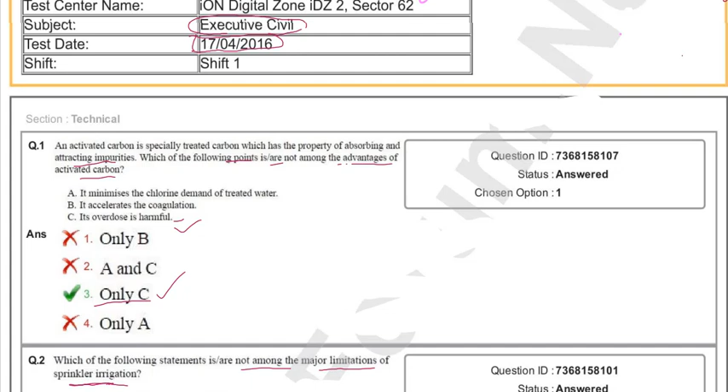Now moving to question number two. Which of the following statements is or are not among the major limitations of sprinkler irrigation? A. Strong wind disturbs the sprinkling. B. It requires heavy initial investment. C. It minimizes the erosion of the soil.

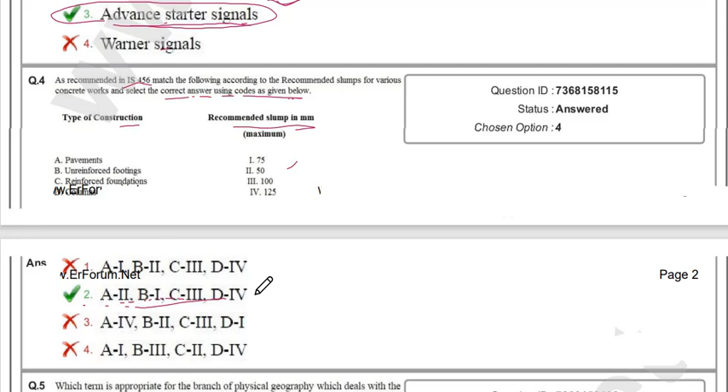Now question number 5. Which term is appropriate for the branch of physical geography which deals with the origin and distribution of water on the earth's surface? For this, option C, hydrology, is the correct answer. Now moving to question number 6: in which type of foundation is the length considerably greater than its width? For this, option 4, strip foundation, is correct. Now question number 7: blank is the algebraic sum of the moments of the forces on either side of the section of a loaded beam. For this, option 4, bending moment, is the correct option.

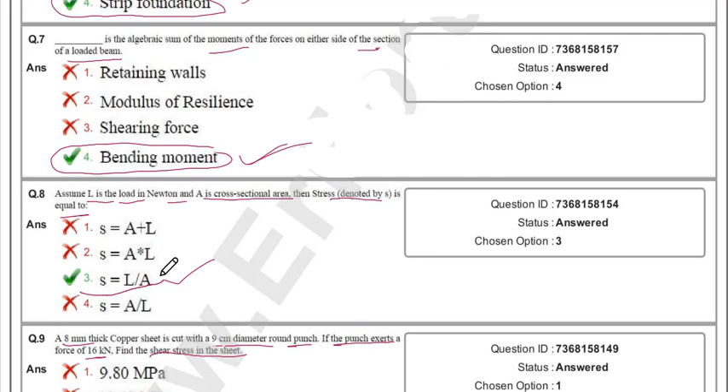Question number 8: assume L is the load in Newton and A is the cross-sectional area, then stress denoted by S is equal to? For this, option C, S = L/A, is the correct option. Now question number 9. An 8 mm thick copper sheet is cut with a 9 centimeter diameter round punch. If the punch exerts a force of 16 kilonewton, find the shear stress in the sheet. You can calculate, and the answer will be the third, 7.08 MPa.

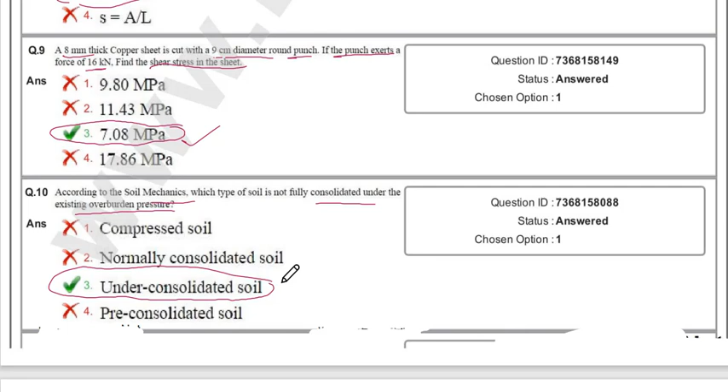Now question number 10. According to soil mechanics, which type of soil is not fully consolidated under the existing overburden pressure? For this, option C, under-consolidated soil, is the correct option. Now question number 11: blank is the normal stress when it acts into the area. For this, option three, compressive stress, is the correct option.

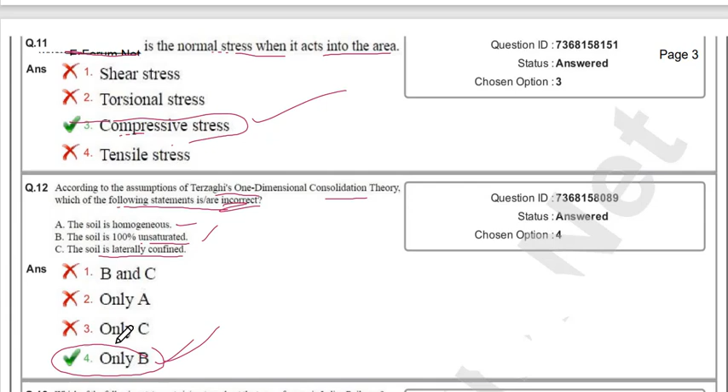Now question number 12. According to the assumptions of Terzaghi's one-dimensional consolidation theory, which of the following statements is or are incorrect? The soil is homogeneous. The soil is 100% unsaturated. The soil is laterally confined. For this, B is the correct option, which is mentioned in option 4. Only B is the correct answer.

Question 13: Which statement is true about the types of gauge in Indian Railways? In broad gauge, the clear distance between inner faces of two rails is 1.676 meter. In meter gauge, it is 1.24 meter. In narrow gauge, it is 0.62 meter. The correct option is the second one.

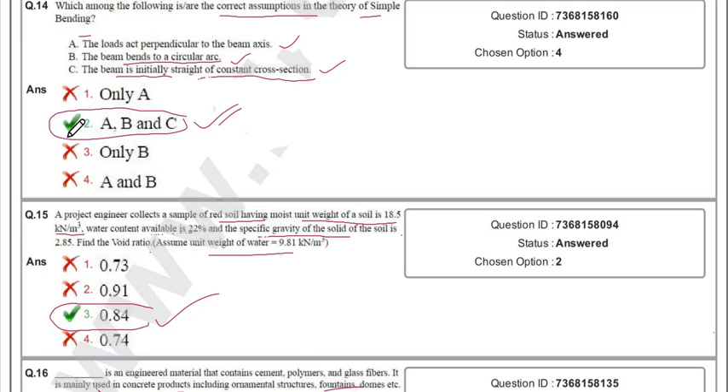Question 14: Which among the following are correct assumptions in the theory of simple bending? A: load acts perpendicular to the beam axis. The beam bends to a circular arc. The beam is initially straight with constant cross section. All of A, B, C are correct, as mentioned in option second.

Question 15: A project engineer collects a sample of red soil having moist unit weight of 18.5 kilonewton per meter cube. Water content available is 22% and specific gravity of soil is 2.85. Find the void ratio, assuming unit weight of water is 9.8 kilonewton per meter cube. You can calculate and the answer will be option third, 0.84.

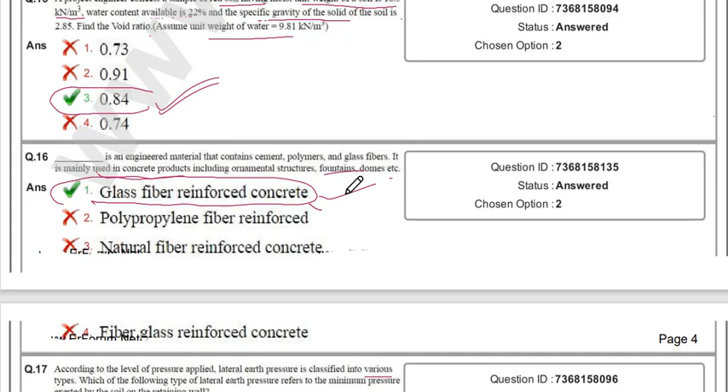Question 16: Dash is an engineered material that contains cement, polymers and glass fiber. It is mainly used in concrete products including ornamental structures, fountains, domes, etc. The correct option is glass fiber reinforced concrete, mentioned in option A.

Question 17: According to the level of pressure applied, lateral earth pressure is classified into various types. Which type refers to the minimum pressure exerted by the soil on the retaining wall? The correct option is second, active earth pressure.

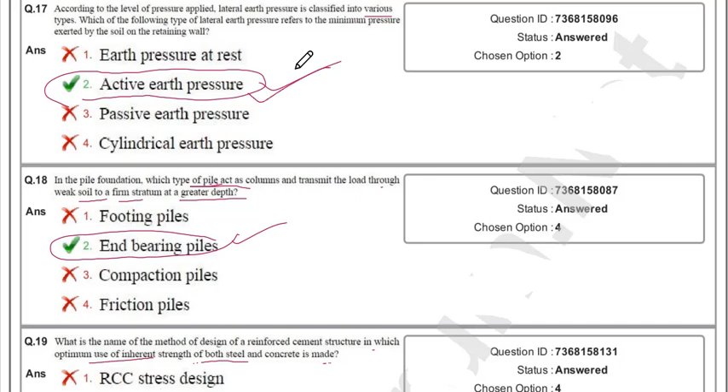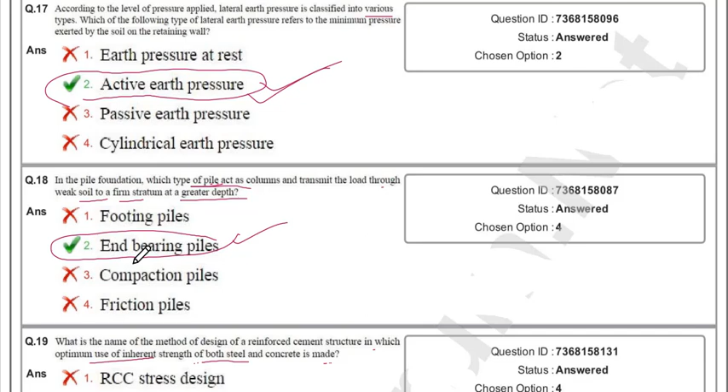Question 18: In pile foundation, which type of pile acts as a column and transmits the load through weak soil to a firm stratum at greater depth? The correct option is second, end bearing piles.

Question 19: What is the name of the method of design of a reinforced cement structure in which optimum use of the inherent strength of both steel and concrete is made? The correct option is fourth, ultimate load strength.

Question 20: Which of the following factors affect the per capita demand of water? Climatic condition of the region, industrial and commercial activity of the region, and population all affect the per capita demand of water. All these are mentioned in option third, ABC, which is the correct option.

Question 21: If R is the radius of the curve in meters and C is the chord length in meters, what would be the expression to denote versine V in millimeters? The correct answer is option third, V equals 125 C square by R.

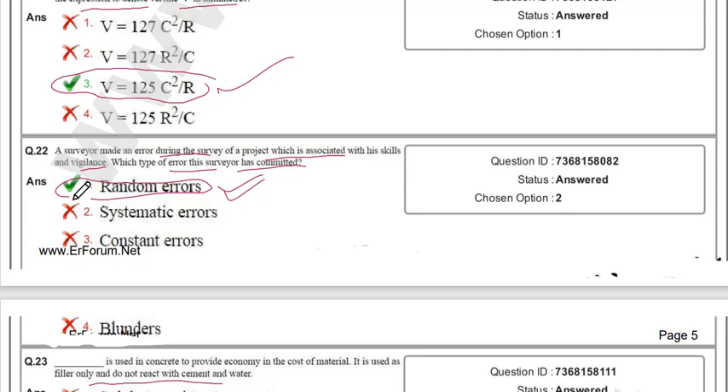Question 22: A surveyor made an error during the survey of a project which is associated with his skill and vigilance. Which type of error has this surveyor committed? This surveyor has committed a random error, mentioned in option A, which is the correct answer.

Question 23: Dash is used in concrete to provide economy in the cost of material. It is used as a filler only and does not react with cement and water. The correct answer is option third, aggregate.

Question 24: Which apparatus is used to perform the soundness test of cement? The Le Chatelier apparatus is used for this. Option A is the correct answer.

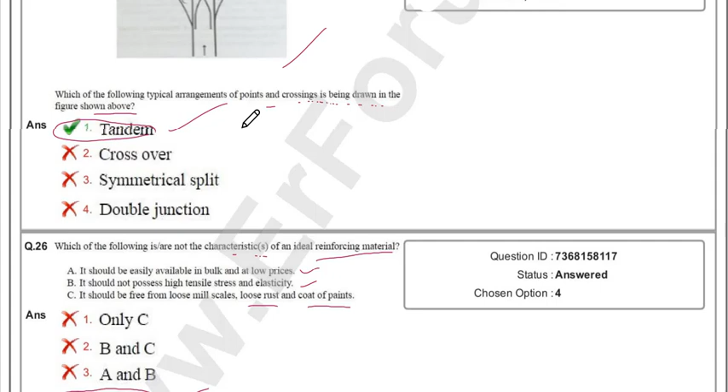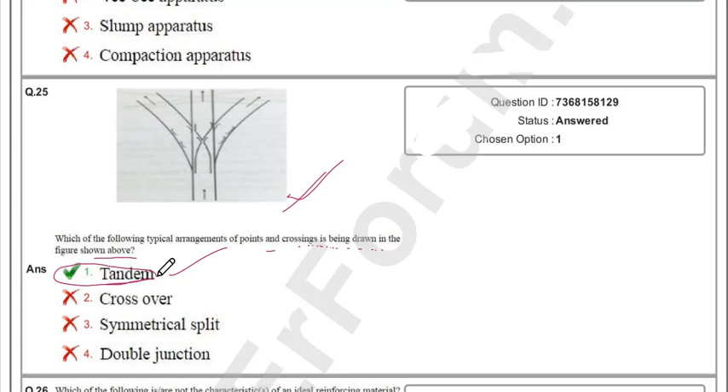Which of the following typical arrangements of points and crossing is being drawn in the figure shown above? This figure shows a tandem arrangement. Option A, tandem, is the correct answer.

Question 26: Which of the following are not the characteristics of an ideal reinforcing material? It should be easily available in bulk at low prices. It should not possess high tensile stress and elasticity. It should be free from loose mill scale, loose rust and coat of paints. Only option B is the correct answer.

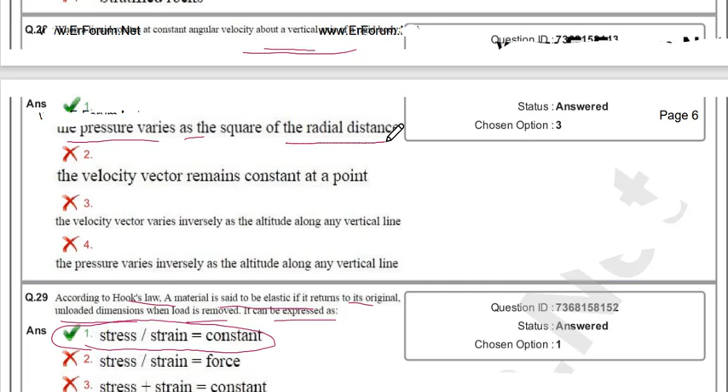Question number 29: According to Hooke's law, a material is said to be elastic if it returns to its original unloaded dimension when load is removed. It can be expressed as stress upon strain equals constant. Option A is the correct answer.

Question number 30: In which type of joint are plates to be fastened placed one over the other and riveted by one or more rows of rivets? Option 4, lap joint, is the correct answer.

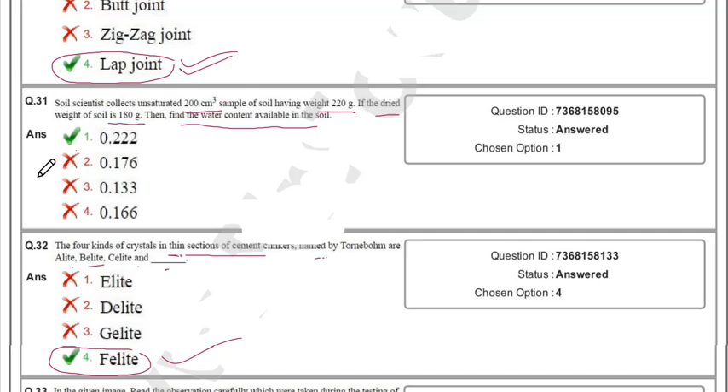Question number 31: Soil scientists collect an unsaturated 200 cubic centimeter sample of soil having weight 220 grams. If dried weight of soil is 180 grams, find the water content available in the soil. You can calculate the amount of water as 0.222.

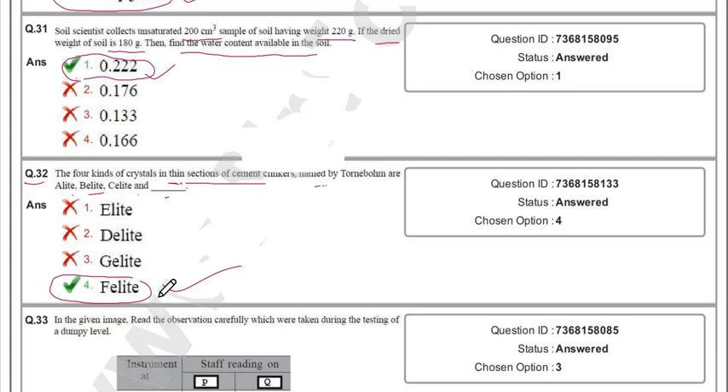Question number 32: The four kinds of crystal in thin section of cement clinker named by Tornebohm are alite, belite, celite, and... felite is the fourth option, which is correct.

Question number 33: In the given image, read the observations carefully which were taken during the testing of a dumpy level. The instrument at P and Q, staff readings on P and Q. For P, the reading is 1.543. For Q, 2.123. Then for Q again, 1.121, and for Q with 1.750.

To what reading should the line of collimation be adjusted when the instrument was at Q? For this, option 1.146 meter is the correct answer.

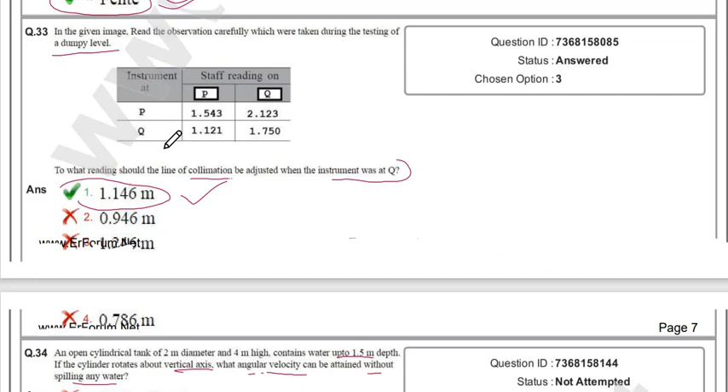Question number 34: An open cylindrical tank of 2 meter diameter and 4 meter height contains water up to 1.5 meter depth. If the cylinder rotates about a vertical axis, what angular velocity can be attained without spilling any water? You can calculate, and 9.9 radian per second will be the correct option.

Question number 35: What would be the approximate weight of rail required for... Question number 34's answer is 9.9 radian per second.

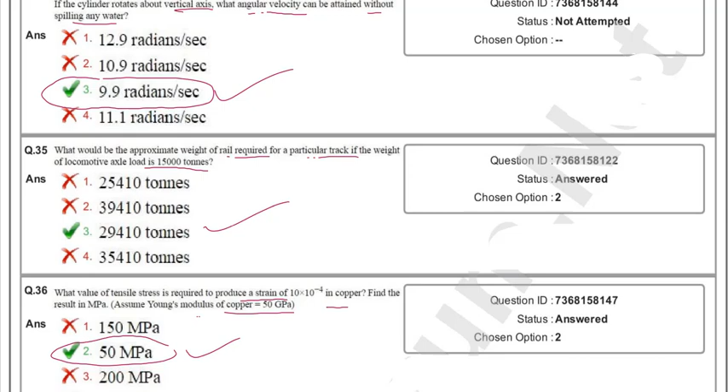Question number 35 asks: what would be the approximate weight of rail required for a particular track if the weight of locomotive axle load is 15,000 tons? You can calculate, and answer third will be the correct option: 29410 tons will be the correct answer.

Question number 36 asks: what value of tensile stress is required to produce a strain of 10 into 10 to the power minus 4 in copper? Find the result in MPa, assuming Young's modulus of copper is 50 GPa. The answer is option second, 50 MPa, is correct.

Question number 37: Which of the following statements are incorrect about prismatic compass? The needle is broad but does not act as an index. Graduated ring is attached with the needle. This does not rotate along with the line of sight. The readings are taken directly seeing through the top of the glass. For this, option C, only C is correct, which is option third.

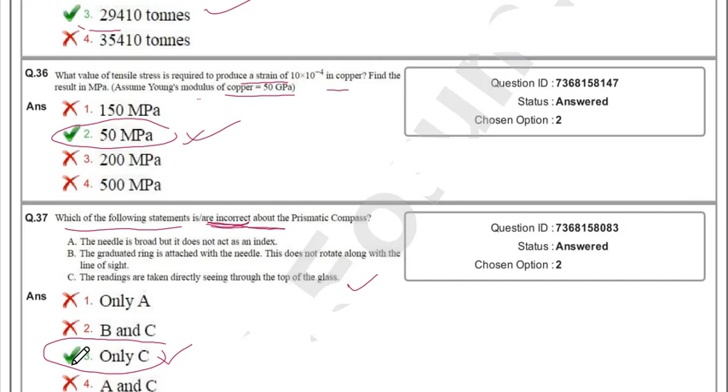Question number 38: Which of the following statements describe limitation of concrete technology? Availability of concrete ingredients easily. Due to low tensile strength, concrete is required to be reinforced to avoid cracks. Monolithic character gives better appearance. The property of concrete possesses high compressive strength. For this, option third, only B, is the correct answer.

Now question number 39.

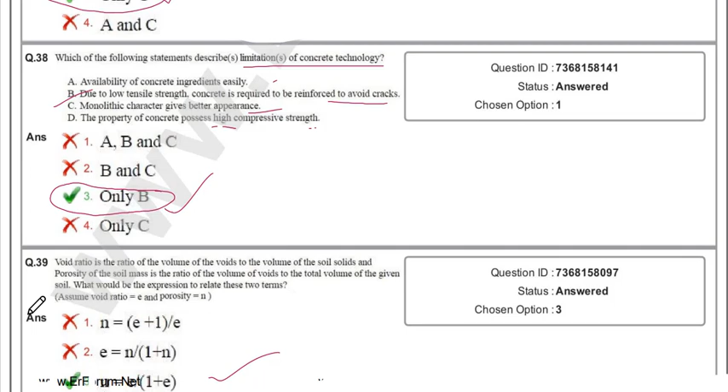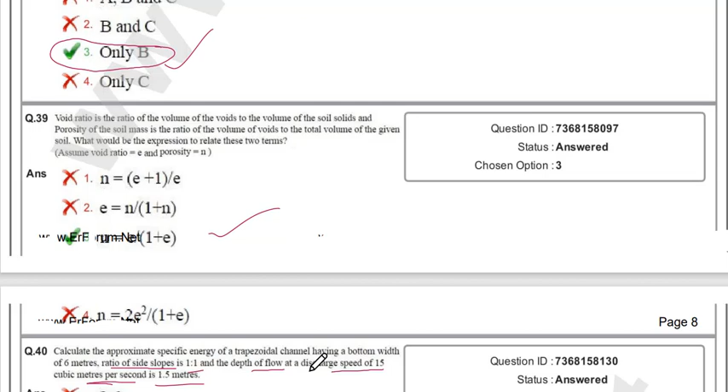Void ratio is the ratio of the volume of the voids to volume of the soil solids, and porosity of the soil mass is the ratio of the volume of the voids to the total volume of the given soil. What would be the expression to relate these two terms? Option third will be the correct answer.

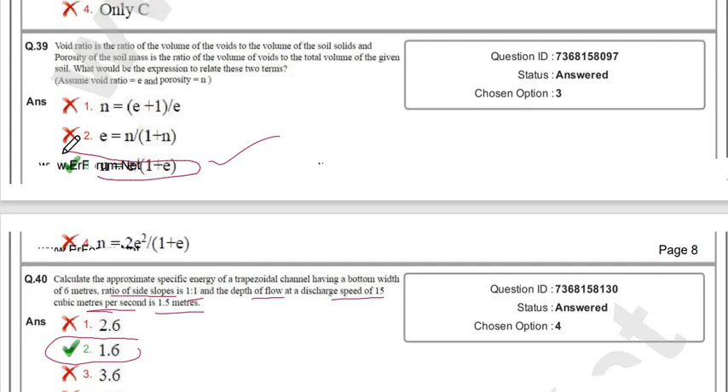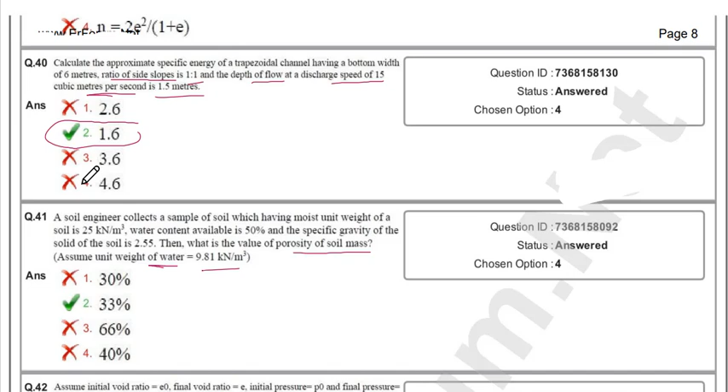Question number 40: Calculate the approximate specific energy of a trapezoidal channel having a bottom width of 6 meters, ratio of side slope is 1:1, and depth of flow at discharge rate of 15 cubic meter per second is 1.5 meter. You can calculate, option second, 1.6 will be the correct answer.

Question number 41: A soil engineer collects a sample of soil having moist unit weight of 25 kilonewton per meter cube. Water content available is 50%, and specific gravity of the soil solids is 2.55. What is the value of the porosity of the soil mass? Assume unit weight of water is equal to 9.81 kilonewton per meter cube. You can calculate, and answer will be second, 33% is the correct answer.

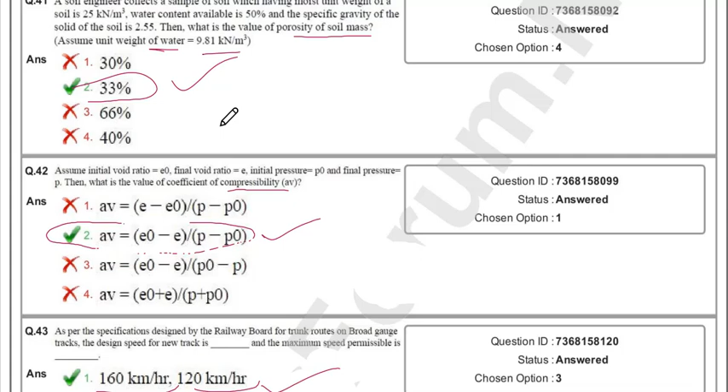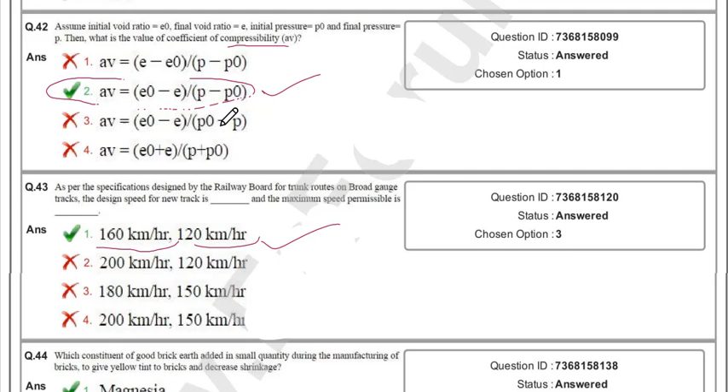Question number 42: Assume initial void ratio is equal to E naught, final void ratio is equal to E, for initial pressure P naught and final pressure P, then what is the value of the coefficient of compressibility AV? So AV is equal to E naught minus E upon P minus P naught is the correct answer, which is mentioned in option second.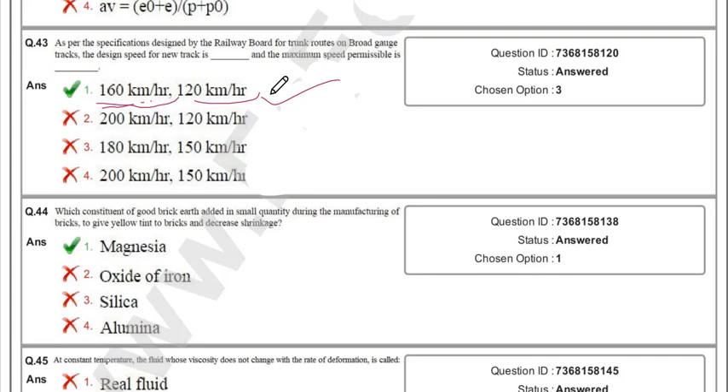Question number 43: As per the specific design by the railway board for trunk route on broad gauge track, the design speed for a new track is dash, and the maximum speed permissible is dash. Option first, 160 km per hour and 120 km per hour, is the correct answer.

Question number 44: Which constituent of good brick earth is added in small quantity during the manufacturing of bricks to give yellow tinge to bricks and decrease the shrinkage. Magnesia is the correct answer, which is mentioned in option A.

Question number 45: At constant temperature, the fluid whose viscosity does not change with the rate of deformation is called Newtonian fluid. Is the correct option. Fourth option is the correct answer.

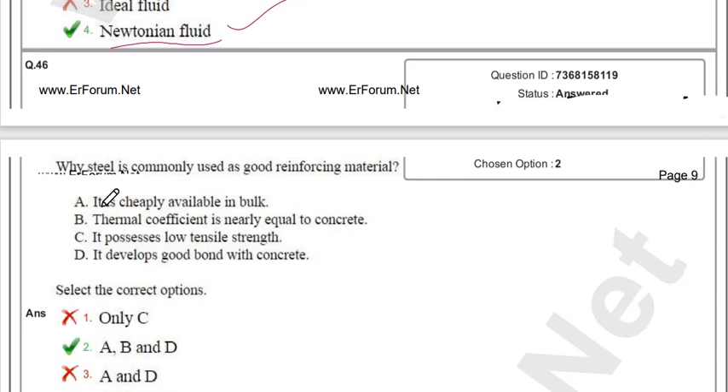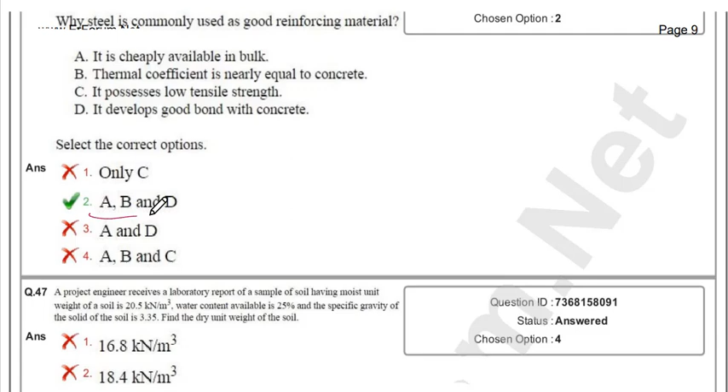Question number 46: Why is steel commonly used as a good reinforcing material? A. It is cheaply available in bulk. B. Thermal coefficient is nearly equal to concrete. C. It possesses low tensile strength. D. It develops good bond with concrete. Select the correct answer. So options A, B, D are correct, which is mentioned in option second.

Question number 47: A project engineer received a laboratory report of a sample of soil having moist unit weight of 20.5 kilonewton per meter cube. Water content available is 25% and specific gravity of the soil solids is 3.35. Find the dry unit weight of the soil. You can calculate, option 4, 16.4 kilonewton per meter cube will be the correct answer.

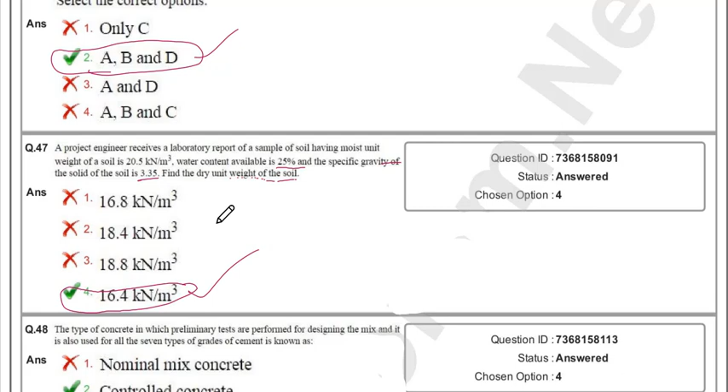Question number 48: The type of concrete in which preliminary tests are performed for designing the mix, and which is also used for all 7 types of grades of cement, is known as - option second, controlled concrete, is the correct answer.

Question number 49: In soil mechanics and foundation engineering, the ratio of the density of the soil to that of water at a given temperature is termed as dash of the soil solid. It is termed as specific gravity of soil solid. So option A is the correct answer.